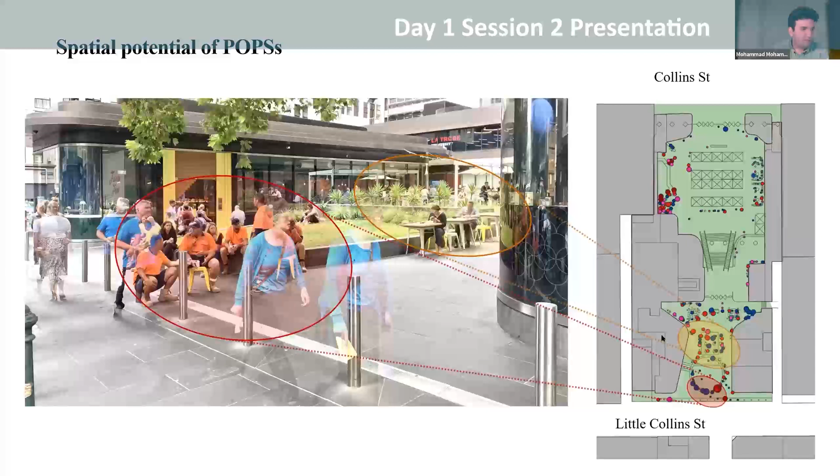Mapping activity based on user characteristics leads us to understand discouraging and encouraging design and management practices for each user type. For example, the gender activity map on the right elaborates on the desirable sub-areas in interior spaces and how they can host different kinds of activities based on gender and number of users.

Observation also shows that users freely appropriate POPS features for their social activities. They change the arrangement of POPS seats for bigger groups and create activity territories for themselves.

Based on Goffman's four levels of encounters, POPS provide social settings for co-presence of users in public life. Bill Hillier argues that co-presence in public spaces is a valuable source of social life, even without any conversation or interaction between users. At the next level of social engagement, POPS usually facilitate co-attention.

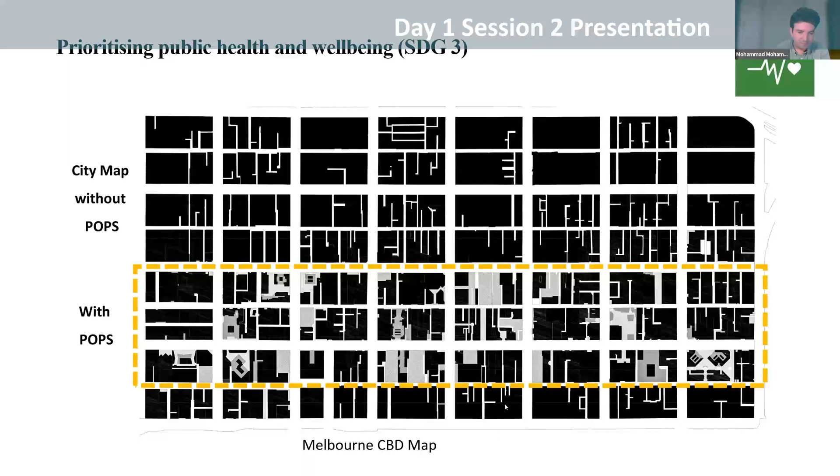Such features lead us to expand equal opportunity and access and strengthen community participation in public life. In successful cases, POPS form a strong connection between city spaces and the community, strengthening community participation, especially for those who don't feel connected with others, like older adults and people with disabilities.

Observation of recent physical interventions in Melbourne POPS show that they could transform into more usable spaces for such types of users. All of these examples lead us to the potential of POPS for reducing inequality.

Several observations at weekends and nighttime, when all office towers and retail stores were closed, show that public users occupy POPS for social activity without purchasing or buying any food or paying anything. They are free and provide various facilities and services for social gathering, like air-conditioned spaces, free toilets, power outlets, free Wi-Fi, and safe and secure spaces.

In contrast to the POPS literature, the presence of security features like guards and cameras works as an encouraging feature, especially for girls and youth. There was minimum interruption of activity by those management features like security guards.

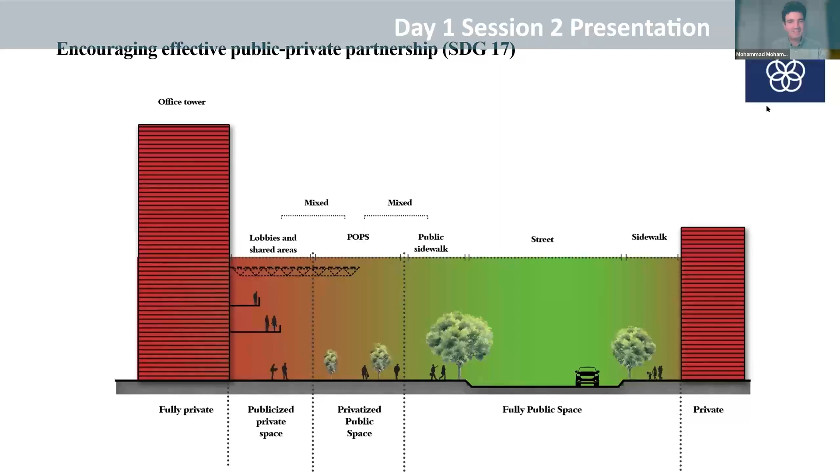Can everyone see the slides? Yes, yes, we can see. Okay, we can hear you. Okay, thank you. Hi everyone.

I will be presenting our chapter titled 'Public Life: Realizing Road Reallocation Projects in Vancouver and Beyond the Pandemic.' As the other co-author of this chapter, Kathleen Corey, is not able to attend this morning, I will be presenting the chapter on our behalf.

Today I will be discussing tactical urbanism in Vancouver, and in particular, road reallocation projects implemented during the pandemic. On March 18, 2020, the province of British Columbia in Canada declared a state of emergency in response to the coronavirus pandemic. Quick build projects were identified as an opportunity to rapidly respond and make more room while many of us were practicing physical distancing. More than ever, City of Vancouver policies and programs were aligned with the global tactical urbanism movement to explore quicker, more cost-effective ways to create spaces for gathering and community building.

The aim of this paper is to capture and discuss how these tactical interventions were delivered under expedited timelines, which tools and resources were available, and what can be done to support public life and active transportation beyond the pandemic.

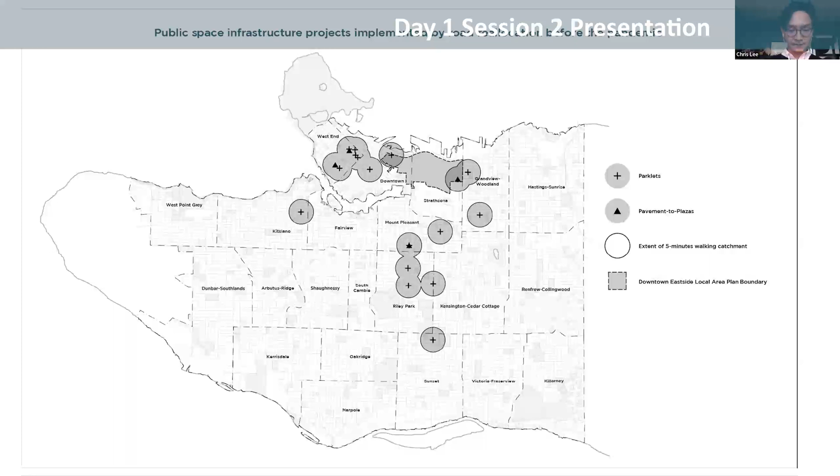Prior to the pandemic, there were 18 parklets and 5 plazas in the central neighborhoods. The number of plazas increased to 20 during the pandemic in central neighborhoods, where there is a concentration of retail streets, with the exception of West Point Grey and Marpole, which are further from the city core but still located on commercial streets. In contrast, 13 out of 15 new parklets built were concentrated in the downtown east side, supporting social service providers and community centers.

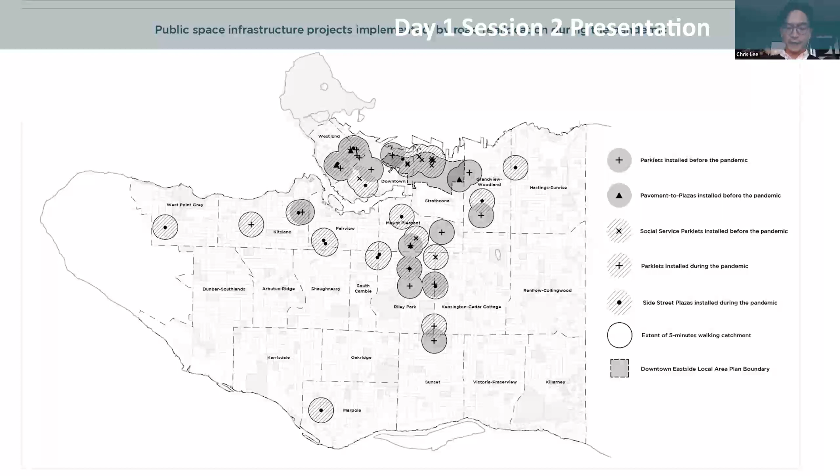The number of curbside patios grew exponentially from 7 to 467, due to council direction to support business recovery and new design guidelines for temporary installations. Meanwhile, the majority of the 20 Room to Queue locations installed were a staff-led initiative to address crowding on sidewalks in front of essential businesses.

Public space infrastructure in the form of side street plazas drew more interest than parklets from business improvement associations, for providing more open space for the reopening of businesses, as well as, over time, places to gather, socialize, and opportunities for programming. Whereas new forms of parklets began by utilizing the same temporary materials as Room to Queue, they became a more suitable typology for rapid deployment in the downtown east side.

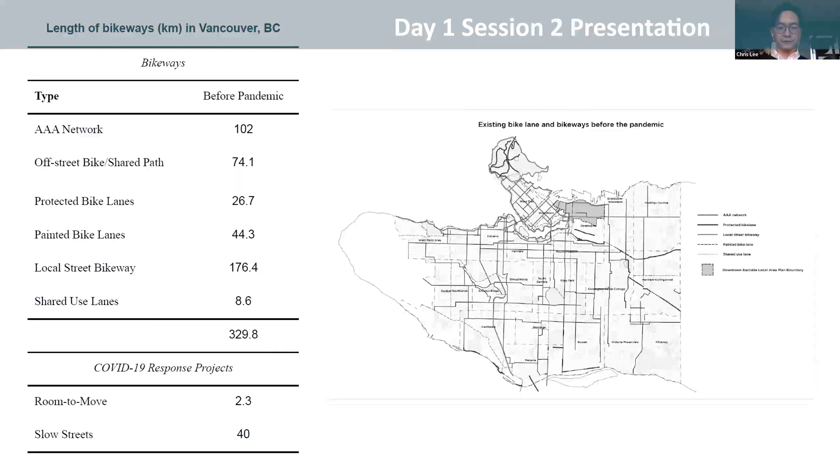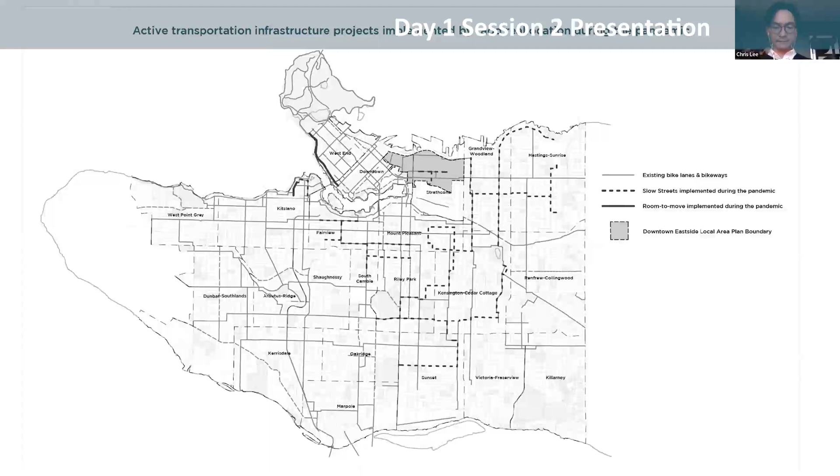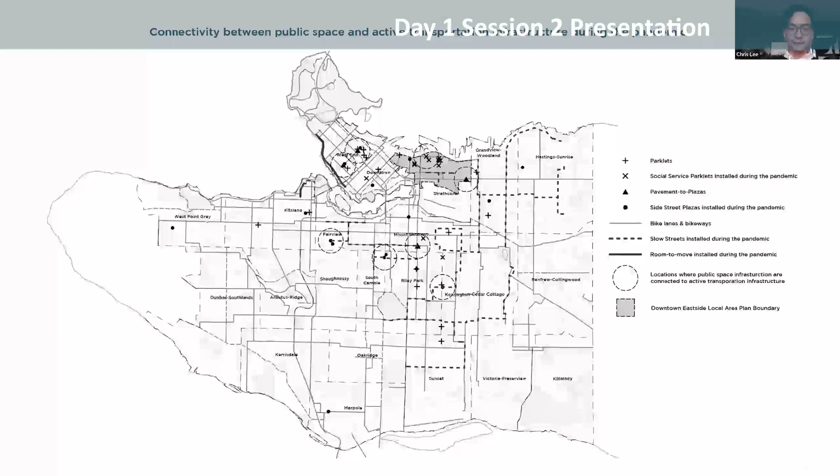This map highlights compatible infrastructure for public space and active transportation, further reinforcing that during the pandemic, most side street plazas were intentionally located on the bikeway and/or slow street to support daily trips to and from commercial streets. The City of Vancouver's public life recovery response and planning during the pandemic can be described as a three-phase approach.

In viewing the tactical projects delivered throughout the pandemic, a progression was observed following an iterative approach, evolving each space in terms of materials and needs.

During the acute response phase, Vancouver reached a moment when it became a spatial public space equity issue, with many of the Room to Queue, Room to Move, and side street locations identified and initiated during this time. Simultaneously, we saw the first iteration of social service parklets installed in the downtown east side. In the pilot, maintain, and enhance phase, there was citywide demand for more public space in the context of supporting physical distancing and social connection.

Converting a block of side street into public space became a more cost-effective solution for maximizing the use of roadways. The transition phase focuses on upgrading approaches to programs as ongoing, seasonal, or obsolete, and regrouping for spring 2022.

The downtown east side was most impacted with an immediate need for community services to serve people in the neighborhood. The same challenge also applied to other social service providers across the city.

In 2014, Council approved the Downtown East Side Plan, outlining strategic directions to improve access to public space, such as the creation of parklets in partnership with community groups and residential associations. During the pandemic, engineering and social planning worked together to deliver parklets for the first time, from the initial planning to design and implementation of the spaces.

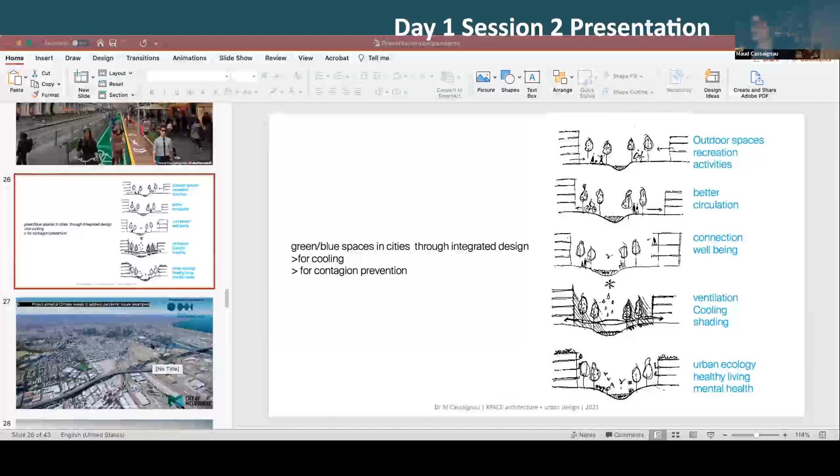So all these aspects are really important in both types of crisis. I reviewed the project Cool Lines, which was done prior to the pandemic climate, but also really feels interesting as a look through the lens of COVID.

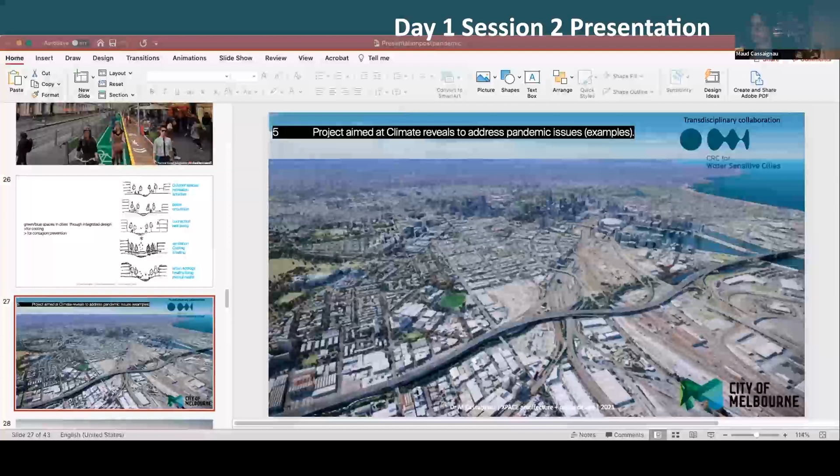We had investigated how a post-industrial suburb in northeast Melbourne could be shielded against urban heat island effect, the effect of hard surfaces creating extreme heat in cities, especially in industrial areas with a lot of hard surfaces. Our proposal developed a strategy of continuous cooling green-blue corridors to reconnect existing urban pockets and parks, and the aim was to use those spaces for evaporative cooling and ventilation, as well as pedestrian and ecological corridors and open spaces.

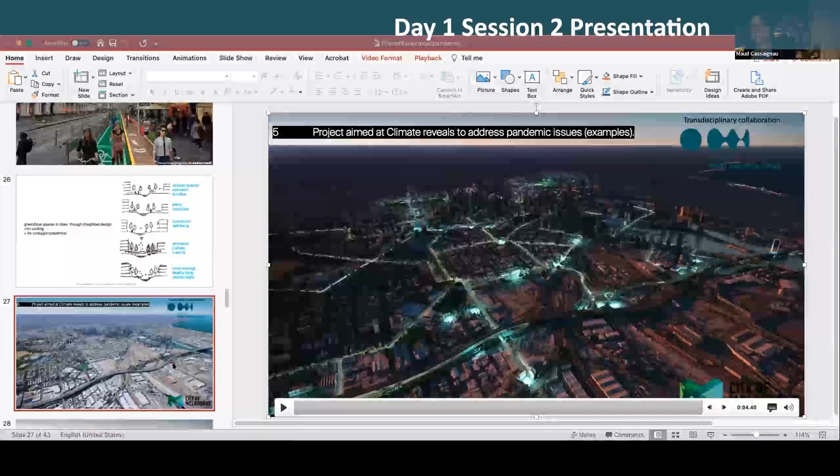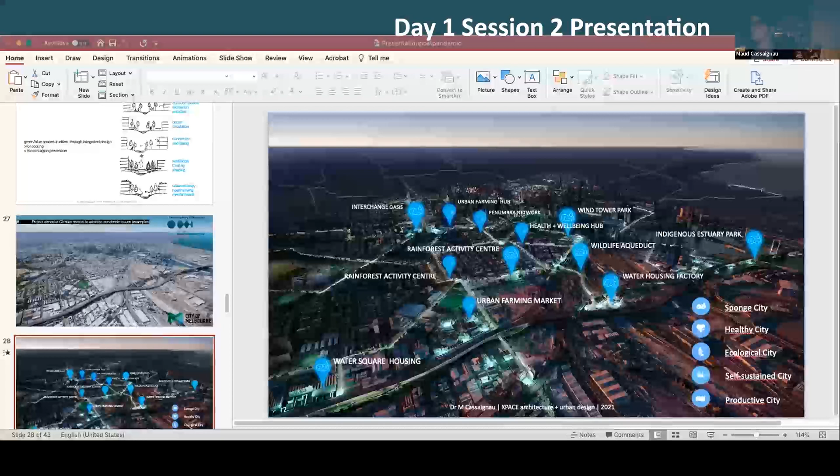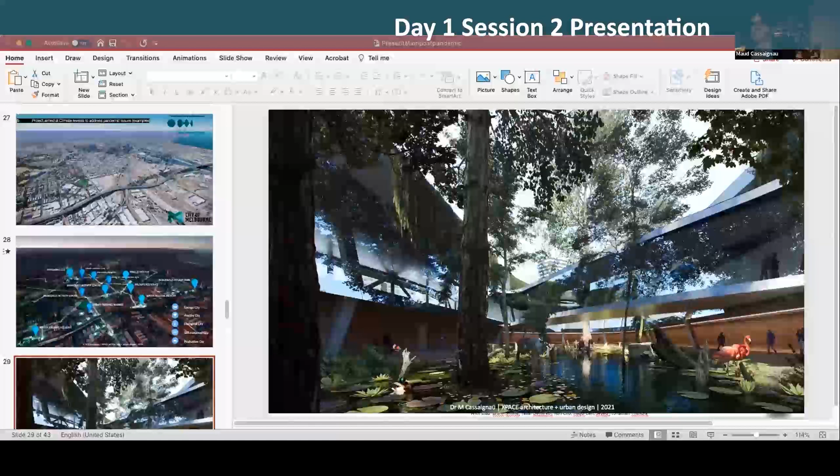A series of strategic interventions was proposed to close the gap in the network between the existing spaces. One intervention proposed an overflow reservoir for the old Elizabeth Street, which would flood regularly because it was covering an old river. At the center, a green open-air overpass with shops would be naturally ventilating using convection.

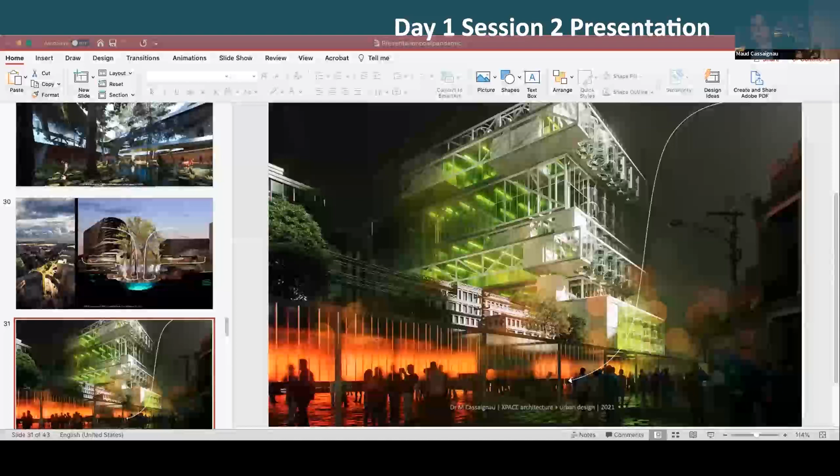Another proposal of urban farming was designed to draw cool air into the streets. A revived old wetland under the freeway would create an indigenous estuary park with outdoor cultural programs to complement the indoor cultural programs which are prevalent in the city.

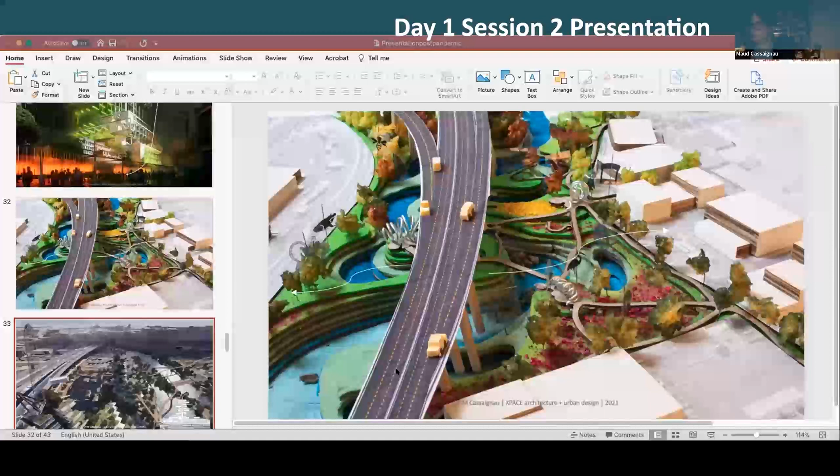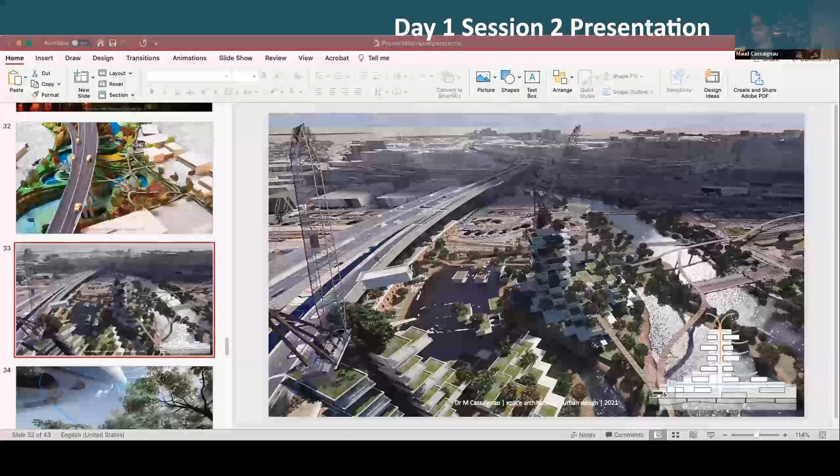An elevated floating housing near a creek would privilege cross-ventilation and outdoor spaces and also create flood-safe housing models. A silo was proposed to be reused for outdoor sport while misting an artificial rainforest and cooling airflows, complementing the typical indoor gyms which are very popular in Melbourne.

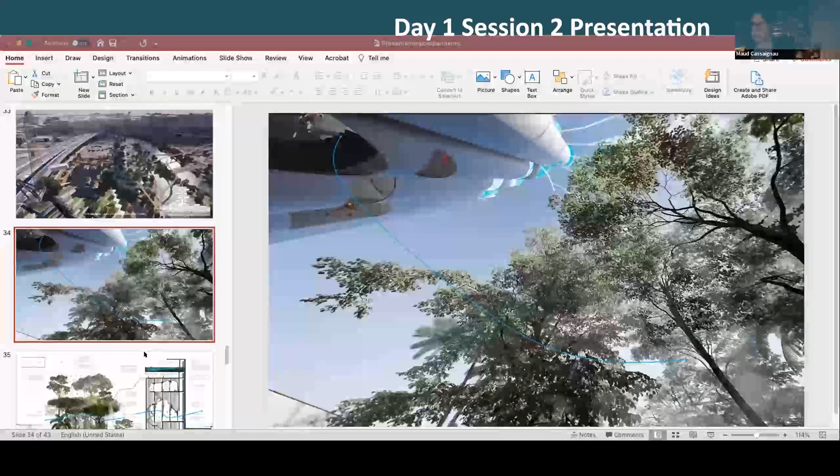The events led the City of Melbourne, with whom we had done the project, to start two new initiatives: a mapping tool, which is interactive, where you can enter your address and which shows you the coolest way through the city between two points, and Cooling Our City, an initiative that incentivizes private urban owners to create cooler spaces throughout the city.

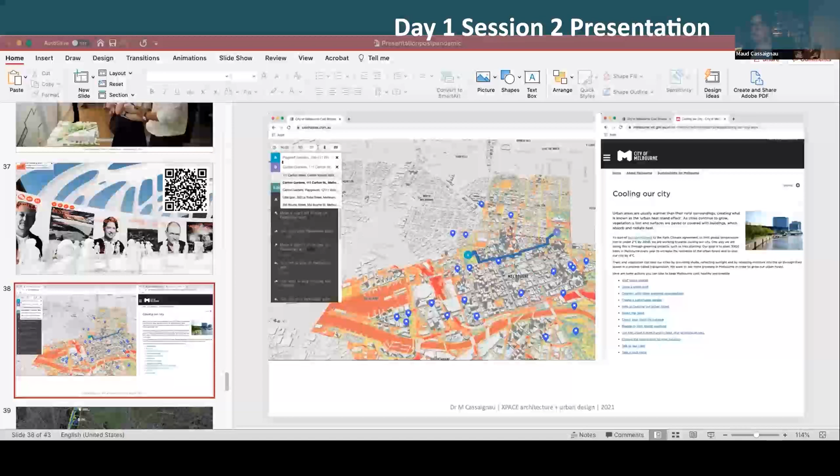But the project also showed how COVID's tactical urbanism strategies could inform climate strategies to be deployed progressively, where temporary or local projects could be deployed one after the other, create momentum to do more of them, and then be networked progressively together.

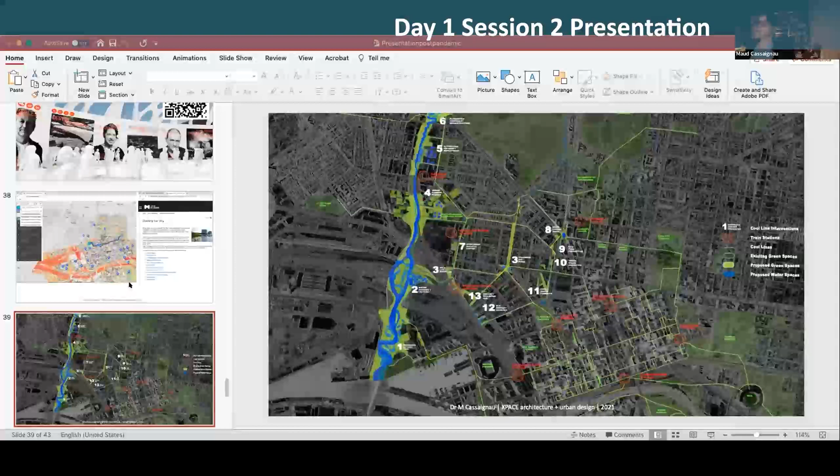As a conclusion, I want to say that this review showed me different aspects and different correlations between the climate crisis and the COVID crisis. What I found was that cool lines throughout cities and cool line networks can both improve climate and health. They can reintroduce ecologies which create better air, better ventilation, heat and water absorption, and better climate.

They can create spaces for activity, socializing, and connection, aspects that were really highlighted as being extremely important in cities, and when deficient, create outbreaks. They can contribute to livability, health, and well-being, all aspects that have strongly suffered in the pandemic.

Network strategies are advantageous because they can be progressive and they can be expanded. They can mix temporary and permanent interventions of different scales, and they can employ tactical urbanism, temporary to permanent strategies to be implemented: creating first temporary interventions, learning from the feedback, making them permanent, and using the learnings from one intervention to inform the next. They can be upgraded, expanded, and retrofitted.

And as decentral solutions, they're easier to manage, they're easier to maintain, and user engagement is much more feasible than large one-off type of strategies. And also, interestingly, the cost can be split between different councils or even between councils and private owners.